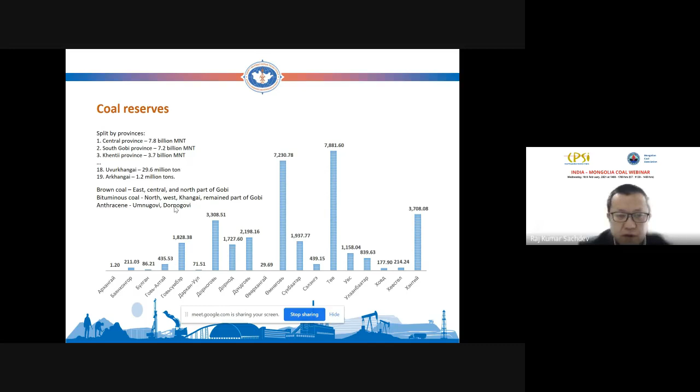In East and Central parts of Mongolia, we have brown coal, lignite, with roughly 3,000 kilocalorie per kilogram heat value, and then bituminous coal and coking coal are located in west, in South Gobi, and in north of Mongolia. Anthracite deposits are mostly in the Gobi desert region, in South Gobi and East Gobi.

Out of 33 billion tons of coal reserves, roughly less than 1 billion ton is anthracite, 13 billion tons is bituminous coal, and 21 billion tons is brown coal.

In the last 10 years, about 353 million tons of coal was mined and consumed for steam, electricity, industry and domestic consumption, and exported.

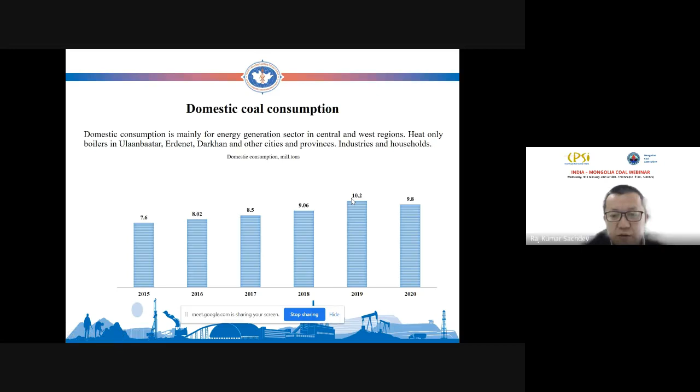Last year, 2020, coal export reduced by 15% because of COVID-19. This graph shows domestic consumption of coal, which is slightly below 10 million tons per year, used mainly for energy generation, electricity and steam.

This data, I guess, is from last year. I have a new one, I will give you later.

The coal for domestic consumption for heat-only boilers is $5 to $15 US, mostly lignite, brown coal. For enterprise industrial use, same price of about $5 to $15 per ton, and household use $4 to $12 per ton.

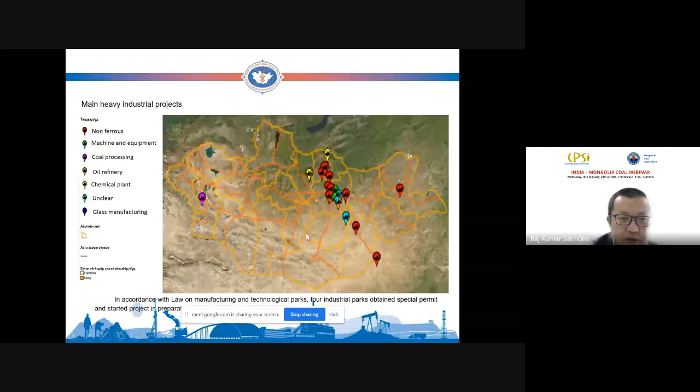One of those projects will be presented here later. These are the non-ferrous projects and some iron ore processing plant locations, and the 3 projects I mentioned about the non-ferrous metal iron smelter are shown here.

Erdenet is the 2nd largest city in Mongolia, and they want to produce cast iron 100,000 tons, reduced iron 100,000 tons, steel items 200,000 tons, and steel bars 160,000 tons.

In Darkhan, where we have the old iron smelting factory, now they want to increase capacity and produce reduced iron, steel bars, and steel balls for mills, for mineral processing plants.

The 3rd project is in Gobi. It is owned by a state-owned company in joint venture with a private company. They also want to produce cast iron, reduced iron, and steel bars. In total, cast iron capacity is 1.5 million tons per year.

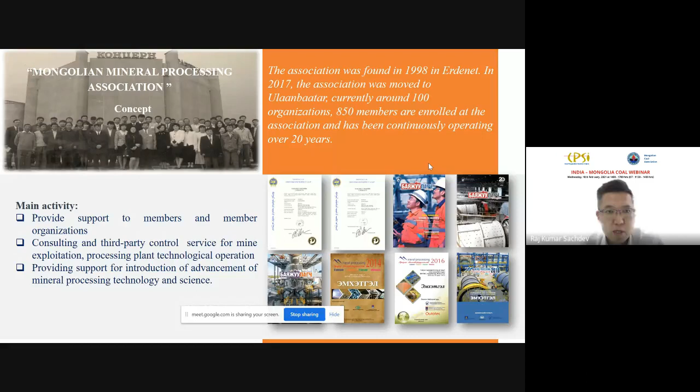This is the continuous table. In total, we now have 21 wet plants, with total capacity of 32 million tons.

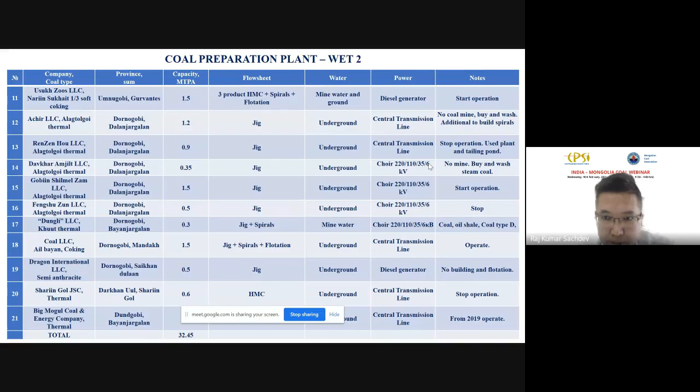Most of these plants were built in the last 10 years, and we are washing thermal coal, mostly coking coal, washed coking coal exported to China, and even thermal coal.

Here is also some thermal coal washing plants. You can see more detailed information, and you can later contact us for more detailed information.

We now have 11 dry processing plants with total capacity of 17 million tons. Mostly the technology is Chinese FGX, and of course Mongolia is dry. Most coking coal deposits are located in the Gobi area, that's why the most interesting technology is the dry technology, and now the second and third generation dry technologies are being tested in Mongolia.

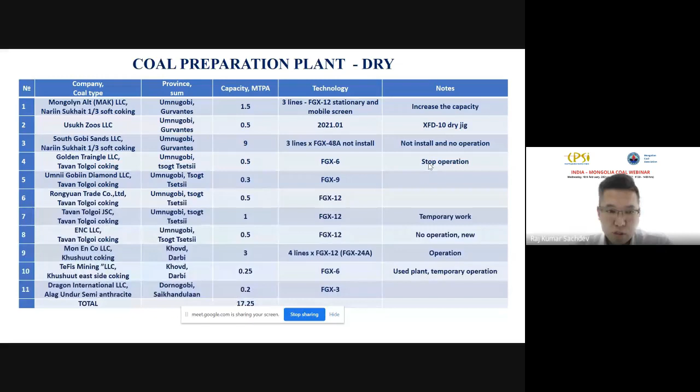You can see here some dry plant pictures, and Mongolia also continues to build the world's biggest coking coal plant based on the Tavan Tolgoi coking coal deposit. This has 30 million tons total capacity.

Here's a summary. Now in 2021, we have total processing plant installed capacity around 50 million tons. From that, only 35% of the processing capacity is used, and we have even more capacity available.

And we can purchase the coal. Even in the near future, we also plan more wet modern coking coal plants in the coal mine, and of course the most interesting technology in Mongolia is dry. We are also interested in dry-wet hybrid technology to build in Mongolian coal mines. The most important project is, of course, in the Tavan Tolgoi and Nariin Sukhait coking coal deposits.

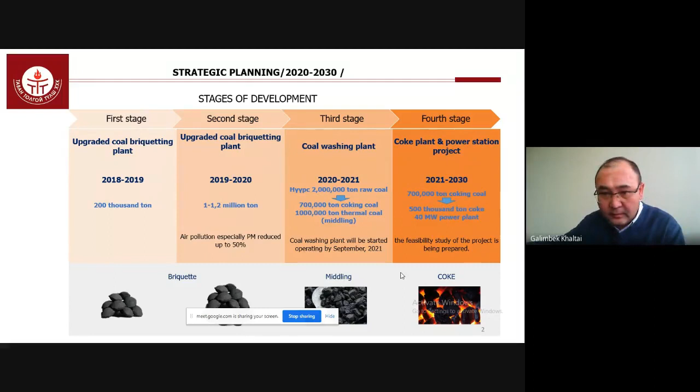Including a coke plant, as you see in the presentation. Now I'm going to introduce you to the current situation of coal coking plants in Mongolia.

The coking plant has 4 coking batteries, each consisting of 30 chambers. That coke making plant has been working on and off, and has never worked at full capacity because of environmental issues.

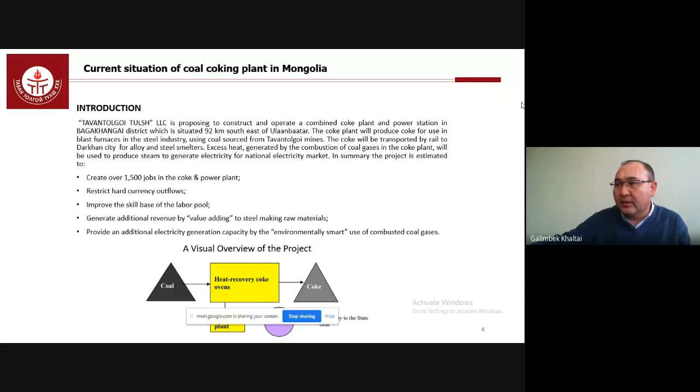As you see on the slide, a visual overview of the project - coal to coke and power process. I'm going to explain it.

The key element to note about the production process is coke is produced by heating coal, and gas is combusted in an environmentally smart way so as to produce the heat to make the coke. Excess heat produced in the process is used to generate electricity. The process doesn't rely on the combustion of coal, only the gas liberated from the coal.

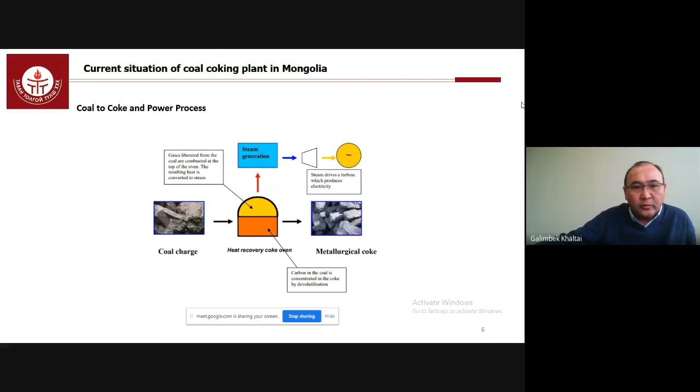Greenhouse gas emissions of the process are typical of simple gas-fired power generation, that is, it raises steam which passes through a turbine. There is a scheme of the coal to coke process.

Now I'm going to explain the need for the project. As each of you knows, Mongolia has huge coking coal and iron ore reserves, which have been exported to China as raw materials. Mongolian iron ore resources are estimated around 1 billion tons, and coking coal resources at more than 20 billion tons.

Now Mongolia has imported a maximum of more than 500,000 tons of steel products from China and Russia. It is valued at 282 million USD over the past 5 years. That import makes up more than 90% of steel supply in the country.

Darkhan Metallurgy plant launched the steel project in order to meet the growing demand for steel import in Mongolia, and the feasibility study of the project was completed.

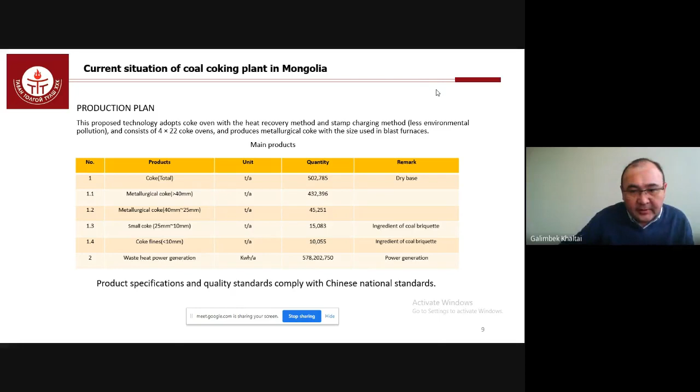There you see the coking process parameters. Also, there is how to work with that coke oven.

Hello? Hello? Am I audible? Yes, we can hear you, Divya. Please carry on. Yes, sure.

Now we would like to have Mr. B. Avid, Secretary General of the Mongolian Academy of Sciences, and he will present the topic Coal, Chemical and Energy: Coal Chemical Studies and Projects in Mongolia.

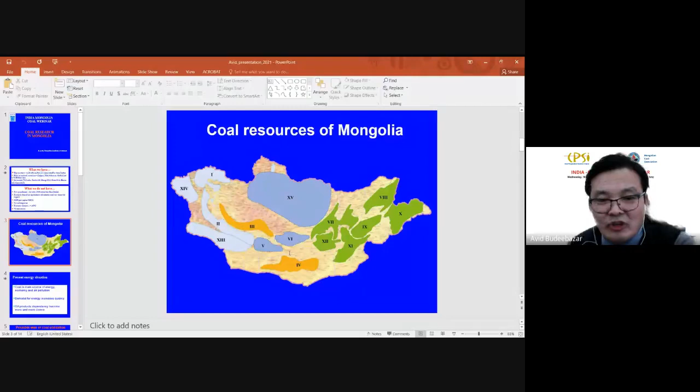But the high quality coals are located in the western part and in the southern part. This high quality coal location is quite close to China, which means it's very suitable to sell or export to China.

So let's say coal is the main source of energy in Mongolia, the main source of the economy, and of course the main source of air pollution. The demand for energy is increasing very quickly due to economic growth, and oil products dependency is getting more and more severe.

So from this we can conclude what is the possible way to use coal. Just in my understanding, the high quality coal should be exported when the price is high. So currently, as you know, we export these coals both raw and washed. I think it's a very good point.

But we have to, or the researchers have to focus on lower rank coals, which are not easy to export because of the quality, and the territory is quite far, so transportation is non-economical. So currently we use the fuel or lower rank coals for power generation, and also for producing some fuels domestically.

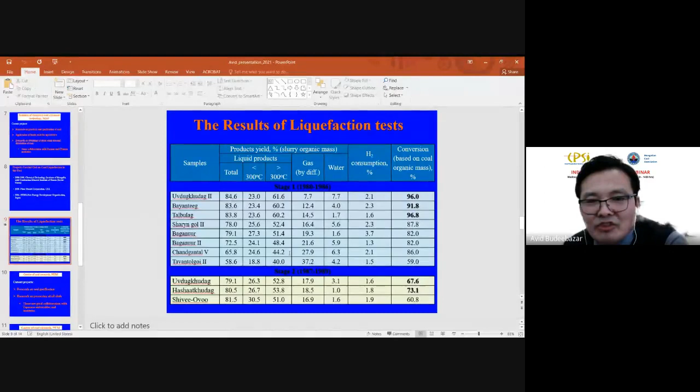Generally, currently quite good research is ongoing in the National University of Mongolia. They also do research on coal gasification and processing of oil shale. Generally, the researchers from the National University of Mongolia have very good collaboration with Japanese universities and institutes.

Also some research is ongoing in the National University of Material Science and Technology. They more or less focus on utilization of coal ash and also research on catalysts for coal conversion and steam reforming. Generally, they have very good collaboration with Chinese universities and institutes.

Just I would like to give 3 references. If you look at these 3 references, you can get general information about coal research in Mongolia, in terms of geology, and of course in terms of chemistry and so on. So I just would like to give these 3 references.

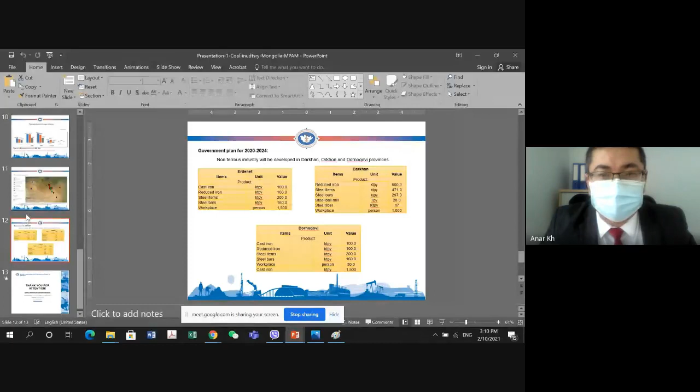This slide shows general information about heavy industry in Mongolia.

There are several policy documents in Mongolia, such as the state policy on the mineral sector and the state policy on heavy industry development program.

In 2019, by resolution number 214, the National Program on Heavy Industry Development was approved.

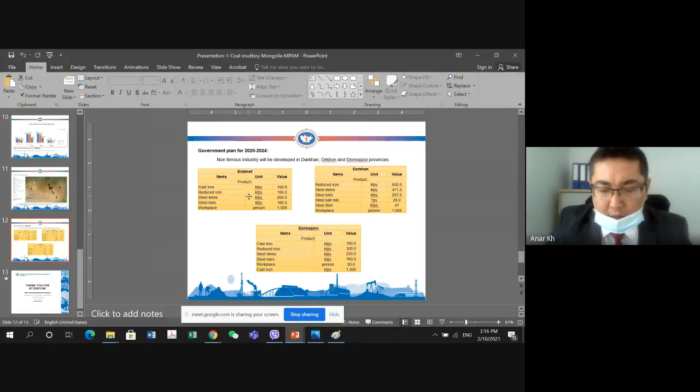So if anyone is interested in those projects, please feel free to contact me through the Coal Association of Mongolia, and I apologize again for not having this presentation due to some issue.

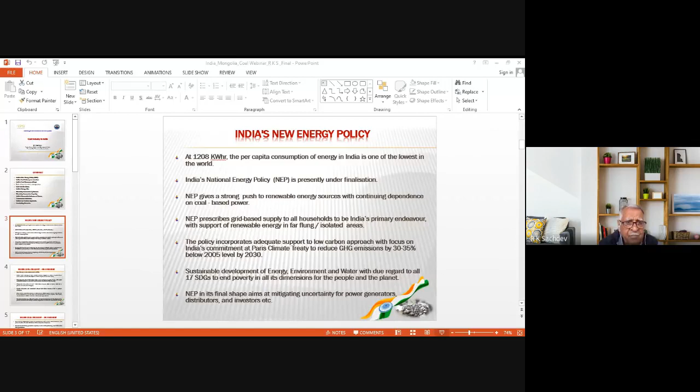On the coal industry, a very brief overview. Our coal mining dates back to 1774, and we are the second largest coal industry in terms of production and fourth largest in terms of proven coal resources in the world.

Our coal deposits have very high ash content because they are of drift origin. Sulfur is very low, below 0.5%. There are 20 major coal fields located in the eastern and southeastern quadrant of the country, which adds to problems of transportation across the country.

The geological resources have been estimated at 344 billion tons. Of these, a little over 150 billion tons are proven resources. Lignite resources are around 46 billion tons, of which about 6 billion tons are in the proven category.

Coal mines were nationalized in 1973, and in 1993 the law was again changed to allow private companies to develop coal mines for their own consumption, but this policy was again changed in 2014. As per the latest government policy, the government has started allowing commercial mining so that private companies can develop coal mines for free sale and consumption of coal within the country, and they can export if there is a market for them.

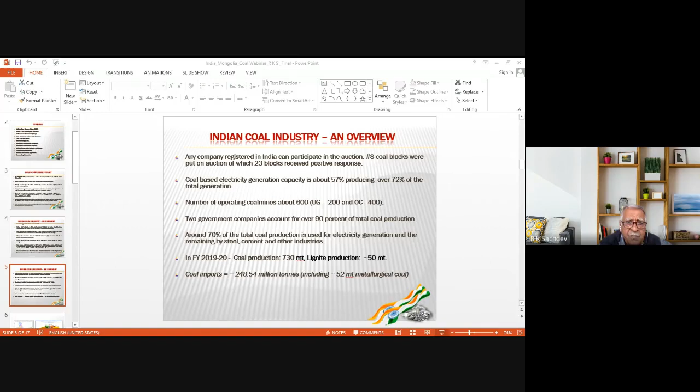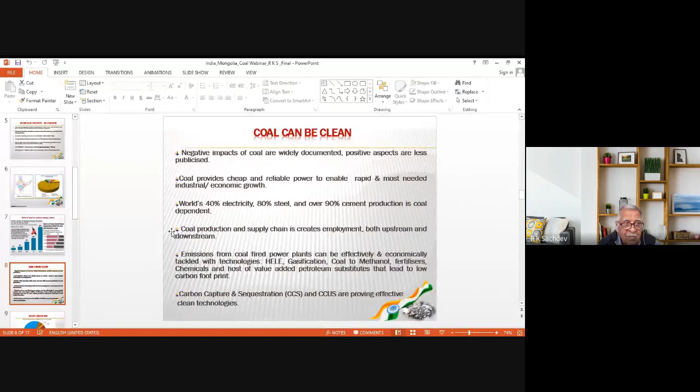Electricity generation by source: in 2019, 1,400 billion units total were generated in the country, of which coal was almost 75%, nuclear was 3.3%, hydro was 11.2%, wind was 4.6%, and solar was 3.6%. This is the total mix of generation of electricity by source.

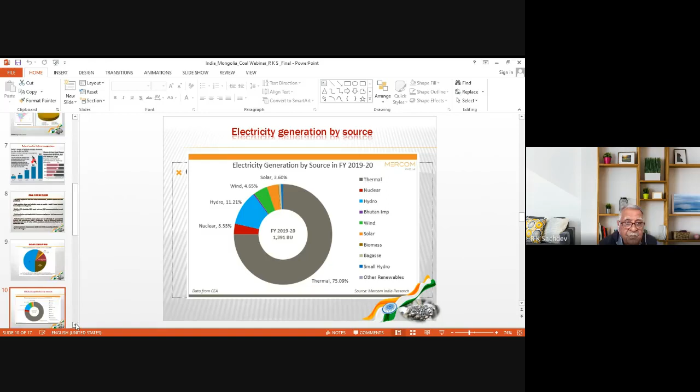While coal will continue to be a major source of energy supply, the country is also putting a lot of stress on renewable energy. There is robust demand, and it is projected to generate 15,000 terawatts of energy in 2040. Projected renewable installed capacity will be 45% of the total in 2030.

Foreign direct investment is coming in a big way to develop renewable energy, particularly solar and wind, because the government has strong policy support aiming at 450 gigawatt capacity by 2030. The target for 2022 has been raised from 175 gigawatt to 225 gigawatt from renewable sources.

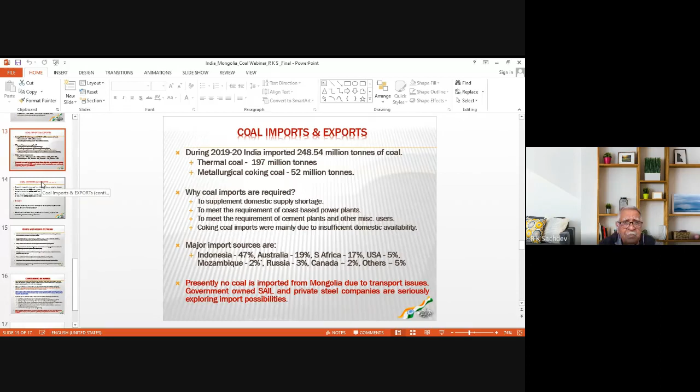What I mentioned about importing from Mongolia is due to logistics problems, but we are working on it together. SAIL and other iron and steel companies are exploring the possibility of getting coal. Our exports are very minimal, and we supply only to neighboring countries like Bangladesh, Nepal, and Bhutan.

On the import side, the government is stressing that imports should be reduced and domestic production increased. But in the matter of coking coal, we will continue to import in large quantities, and probably Mongolia will start supplying coking coal very soon, maybe next year or the year after, so that business relations between Mongolia and India get deeper.

Now, in the current scenario of many countries moving away from coal, given India's shortage of hydrocarbon reserves, we are import-dependent to the extent of 86% on hydrocarbon, oil and gas. So our dependence on coal will continue largely for the next 3 to 4 decades or even beyond. We are stressing on reducing emissions as agreed at the Paris Climate Treaty, as I already mentioned, by having more renewable capacity. There is also a push for electric vehicles, with a program for installation of charging stations at very short distances already underway.

Thank you, sir. My topic of presentation is coal preparation status of India, plant list and technology. I am Gouri Charan, working as Chief Scientist at the Central Institute of Mining and Fuel Research. Next slide, Divya.

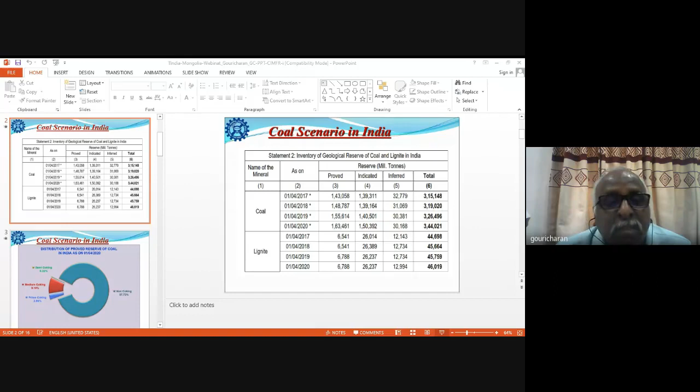As Sachdev sir already told you about the coal scenario in India, just skip this slide, Divya. I wanted to let you know that most of our coal resources, about 87%, are non-coking coal variety, and the rest is coking coal. We also have some high sulfur coals and tertiary coals, but the major part of our coal reserves are non-coking coal reserves. Next slide, please.

Coming to coking coal reserves, most of our coking coal reserves are in the Jharia and Bokaro coal fields. You can see the distribution - most of our present coking coals come from lower seams, since coals in the upper seams are exhausted; now we are going for lower seams, seam 5, 6, 7 and below. These coals have very low volatile matter. I'll now show you the characteristics of our coking coal. Next slide, please.

You can see the characteristics of our coking coal. Our coking coals have very high ash content, ranging from 30 to 55%, even 50-60% in some coals available in the coking coal belt of Jharia, especially in the western Jharia part. Our coking coals have low volatile matter content but are highly mature. One major problem of our coking coal is poor washability potential - they fall under the category of difficult to wash. These coals are very difficult to wash because of typical geological formations, highly intergrown mineral matter, high near-gravity material at the desired density of cut, and poor plant performance. We are presently facing this problem because our washability potential is very poor. I will show you the list of washeries. Next slide, please.

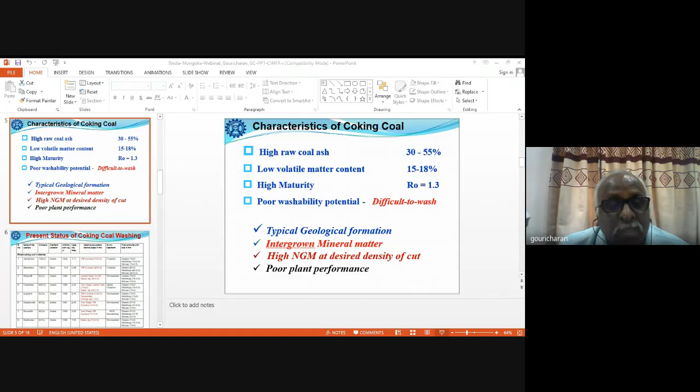We have started with coking coal washing right from 1951. Initially, we had around 35 coking coal washeries in India, both in public and private domain. And because most of our upper seams have exhausted, these washeries were mainly constructed based upon the coal characteristics then available based on the upper coal seams.

Now we are mining lower seam coal, and when these coals are fed to the old coking coal washeries, they don't perform well. That is why most of our coking coal washeries have been dismantled, and they are going for new washeries. Presently we have 16 coking coal washeries under operation, 8 in the prime coking belt of Jharia, and 8 in the medium coking coal washeries in the Bokaro coalfields.

For coking coal washing in India, we mainly use jig separation for coarser particles, heavy medium cyclone for the intermediate range, and flotation for coal fines. But most public washeries, like CCL and BCCL (Bharat Coking Coal Limited) washeries, don't process the coal fines. They are just left out, segregated in tailing ponds, and used for different purposes.

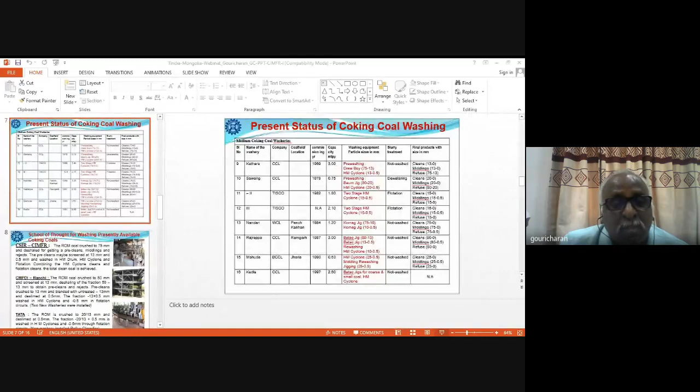So what is the school of thought presently for coking coal? We have recently carried out a lot of tests on low volatile coking coals, and 3 schools of thought have come up. One is the Central Institute of Mining and Fuel Research school of thought, where we crush the ROM to a top size of 75 mm and deshale to get pre-cleans, middlings, and rejects.

The pre-cleans are screened at 13 mm and 0.5 mm, and then washed in HM drum, cyclones, and flotation. Combining these 3 cleans, we get the total cleans. So this is the school of thought for a simpler process.

CMPDI Ranchi has their own school of thought: the ROM coal is crushed to 50 mm and screened at 13 mm. The fraction 50 to 13 mm is deshaled to obtain pre-cleans and rejects. Then the pre-cleans are crushed to 13 mm and blended with the untreated minus 13 mm. They are deslimed at 0.5 mm, and the fraction 13 to 0.5 mm is washed in heavy medium cyclones, while minus 0.5 mm is washed in flotation.

Based upon this school of thought, 2 new coking coal washeries have come up in India recently and are under operation, and a few more washeries are coming up based upon this scheme.

While Tata's, right from the beginning, crush the ROM coal to 20 or 13 mm top size, screen at 0.5 mm, wash the 13 to 0.5 mm fraction in a 2-stage heavy medium cyclone, and wash the minus 0.5 mm in the flotation circuits.

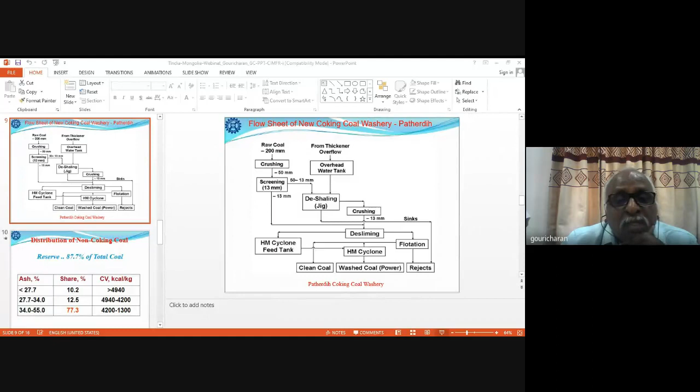Coming to non-coking coal, already we have a huge resource of non-coking coal, but unfortunately, the majority of our resources fall above 34% ash content. Its share is around more than 77%. So these coals we need to wash and use in power plants or for other uses.

The non-coking coal washing presently adopted in most Indian non-coking coal washeries involves washing only the coarser fraction, that is plus 30 or 13 mm, and mixing the minus 30 or 13 mm with the clean coal. So this is a partial beneficiation approach. One typical example is the Piparwar coal washery, a non-coking coal washery following this partial coal beneficiation. They only wash the coarser fraction in a jig, and the minus 30 mm is blended with the cleans from the jig and used for power generation. So this is the typical washing option followed in India, especially for beneficiation of non-coking coal.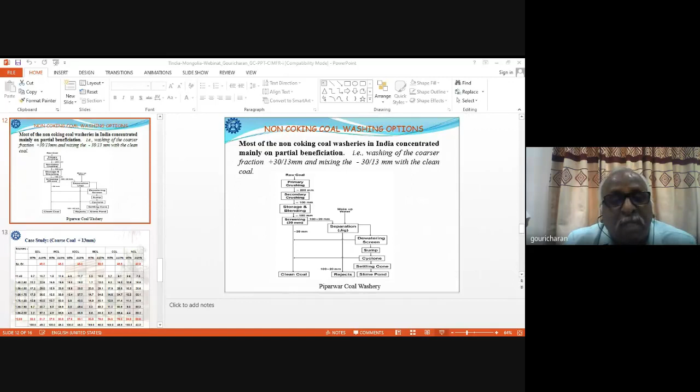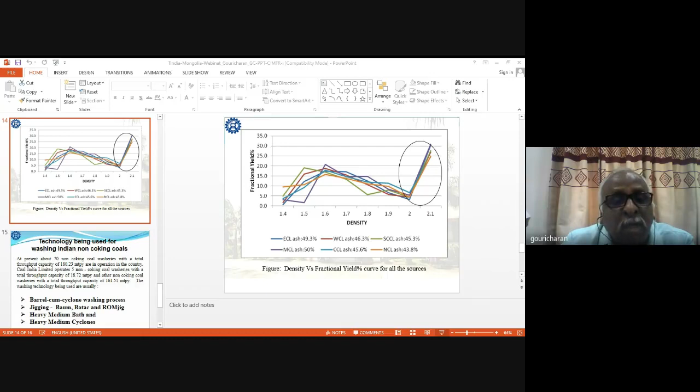The next graph will show you that most of the coal is concentrated about 2 specific gravity. So we may not require a very high level of washing, just simple deshaling. If we remove the material above 2 specific gravity, we will achieve more or less 30-35% ash material. So for our Indian coal washing, we need only simple deshaling. If we deshale in a jig or anything, we can remove this high gravity material instead of going for a very complicated circuit like using an HM circuit; we can simply remove this material above 2 specific gravity, and then achieve our required ash in the clean coal.

Already technology is being used for washing non-coking coal. Most of our 70 non-coking coal washeries have a total throughput capacity of about 180 million tons per annum, and Coal India Limited operates 5 non-coking coal washeries with a throughput capacity of 18 million tons per annum, with others in the private sector. As already told, most of them go for partial beneficiation only, using barrel cum cyclone washing process. Some washeries have installed barrel washers. We also use jigging, all types of jigs like Baum jig, Batac jig, and rom jig; Bina washery has installed a rom jig. In some washeries they use heavy medium bath and heavy medium cyclone. So fines are not being beneficiated presently for non-coking coal; only the coarser fraction is washed.

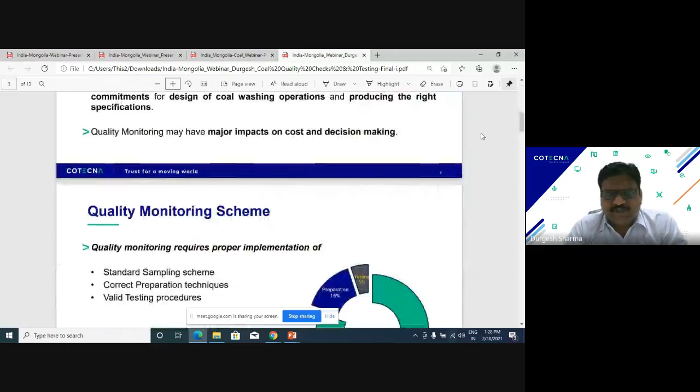We know a lot about Indian coal, which has been covered by Sastev sir and Dr. Gauri Charan. Now let us look into how quality is to be maintained, or how quality monitoring is to be done, in the supply chain of coal. Quality monitoring is an essential requirement for process control, plant performance, and for any transaction between the consumer and the producers. This is very important in all these three factors.

It requires proper implementation of a standard sampling scheme, preparation, and testing procedures. How can it impact? In the coal mining and processing industry, the decisions may involve huge capital investments for designing coal operations and producing the right specifications. That's why quality monitoring may have a major impact on cost and decision making.

Next slide please. In a quality monitoring scheme, there are 3 major steps which need to be properly implemented: sampling, sample preparation, and testing. If you see the graphs, sampling itself contributes to approximately 80% of where sampling variations take place. So the sampling activity itself is very important. 15% is contributed through sample preparation, and only 5% in testing, because a lot of sophisticated instruments are available for testing the quality of coal in the lab these days.

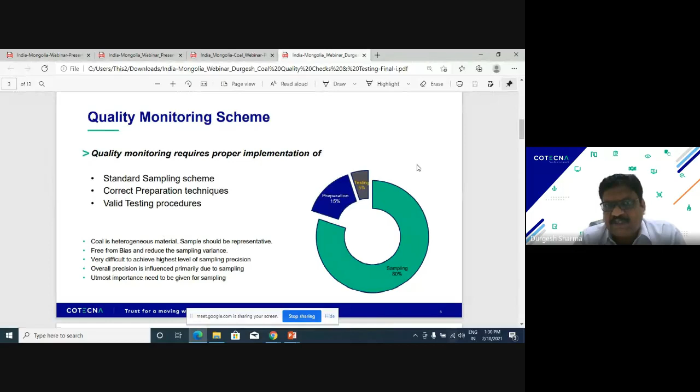Next slide please. Coal quality checks at the value chain: starting from exploration up to the market, coal goes through these 4 steps - exploration, mining, processing, and then utilization at the consumer places. It is either used in the blast furnace or in boilers, wherever it is used. At each step in the quality checks in the value chain, it has sub-processes.

At exploration, coal quality has to be taken care of at the exploration stage when you are drilling the cores - what is the geology of the coal, what is the mineralogy of the coal. All these properties make a lot of difference when the coal is utilized for a specific purpose. So at mining, we also have to take care of quality checks and testing, and the sub-processes have been defined here.

I will not go through the total details of each process here due to time constraints, but you will get this presentation and can go through it. Processing also, of course, for plant efficiency - sampling what we are feeding to the plant and what we are getting out of it has to be controlled. Then in the market, the specific requirement of the specific use, whether it is power plants or steel plants, those quality checks have to be maintained as per the required specifications of the market.

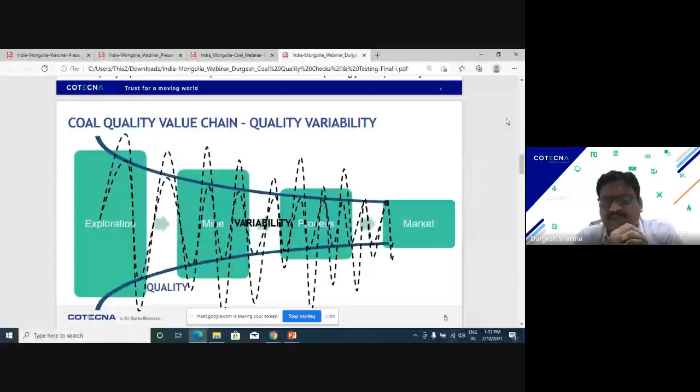As I mentioned, sampling scheme, preparation and testing are the 3 major steps of quality monitoring.

In sampling scheme, due to technical, cost and time constraints, the sampling procedure can be modified from the standards. We have BIS standards in India, ASTM standards, and ISO standards, but depending upon these 3 parameters, it can be slightly modified.

But while modifying and implementing or establishing a sampling scheme, we have to take care of a few aspects which are important to get a correct representative sample and to get the correct results.

That is the purpose of the sample. What is the purpose of the sample? You are doing it for a regular quality check, for the plant design, or the process design, or using it at the blast furnace or power plant. So what is the purpose of taking the sample?

Increment collection method - whether the sampling should be mechanical or manual. Decide whether continuous or intermittent sampling is done. Sampling should be from moving belts or stationary lots. Selection of appropriate procedures, define the lots, number of lots, increments, mass of the increment, and the sampling device which we are going to use, because all these conditions affect the sampling precision and accuracy.

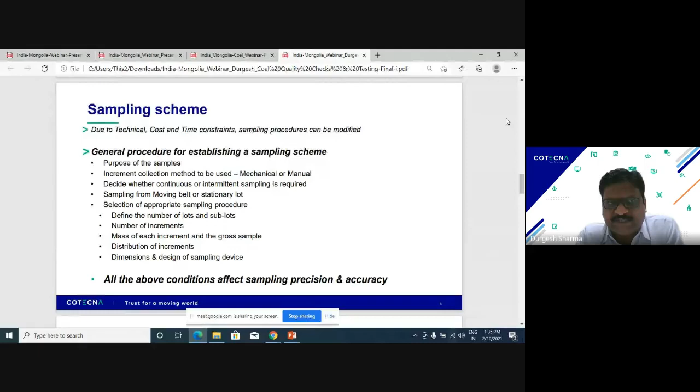This is the importance. Please, next slide.

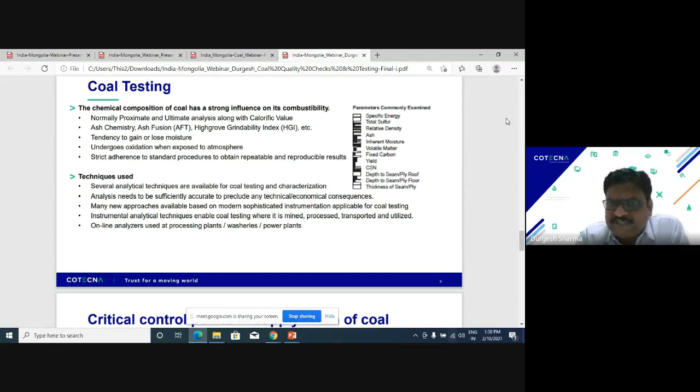What are the techniques used for coal testing these days? There are several techniques available in the market for coal testing and characterization. A number of modern, sophisticated instruments have come up, like even for proximate analysis, ultimate analysis, or calorific value - you have high accuracy instruments available in the market which give very, very accurate results when tested in the lab.

As I mentioned in the first slide itself, only 5% errors in the coal testing labs, because you have the sophisticated instruments available for this. So sufficient accuracy of the results is important.

Instrumentation analysis techniques are also available, and they can be applied at the complete supply chain of coal, that is where it is mined, where it is processed, where it is transported, and when it is utilized in the plants. There are online analyzers also available these days, which give you a quick analysis, and they are implemented or installed in some of the processing plants, washeries, and power plants also, which gives you the quick analysis.

These are some of the critical control points in the supply chain. At the mining head, we have to look at in-pit drilling, sampling, and data analysis. Sizing of the coal matters a lot, because smaller the size, better would be the precision, and more representative will be the sample.

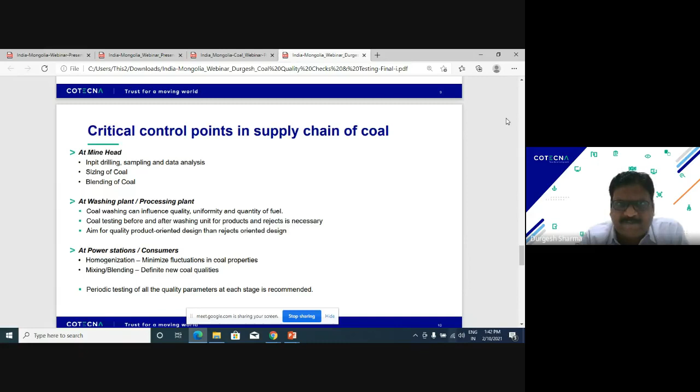Losses and measure techniques can also be defined here on a short-term and long-term basis. In the long term, it is recommended that auto-mechanical sampling systems should be available at all sampling points, so that you remove human interference and human errors. Auto-mechanical augers for stationary sampling and auto-mechanical samplers for bulk sampling - this can be the long-term solution.

But sometimes if you have to go for manual sampling, short-term losses and measures techniques are also defined. When you do the sampling or quality checks manually, you should have practical procedures of routine implementation and checks, so that you minimize errors and perform periodic tests at each stage for each activity. Those periodic tests for sampling and testing measure overall precision - you have to measure that so you understand how much you are deviating from the standard. This includes increment variations, sampling and preparation and testing variance, and bias test. This bias test should be done even for mechanical sampling devices as well.

This is one example of how quality control is introduced by the Government of India in domestic coal supply to the power industry. The objective of this project is establishing quality control in domestic coal supply from coal mines up to the thermal power plants. This exercise is conducted in collaboration with three ministries - the Ministry of Coal, Ministry of Power, and Ministry of Technology - and it has been sublet to my company, that is Cotecna Inspection India.

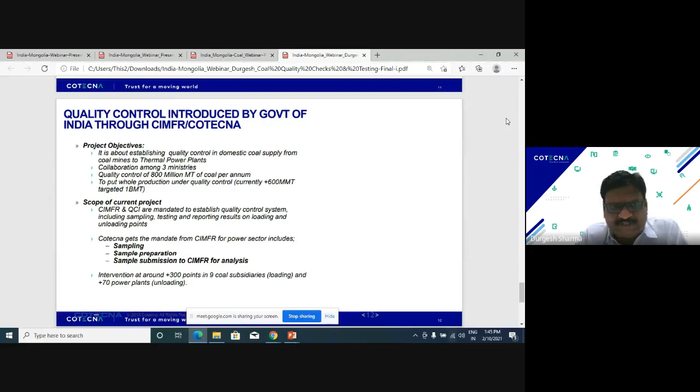I would conclude with this: there are different flavors of coal, different tastes in boilers, and different reasons to select one recipe or technology instead of another, because coal is an economical source of energy, and controlling coal quality is a way to do more with less.

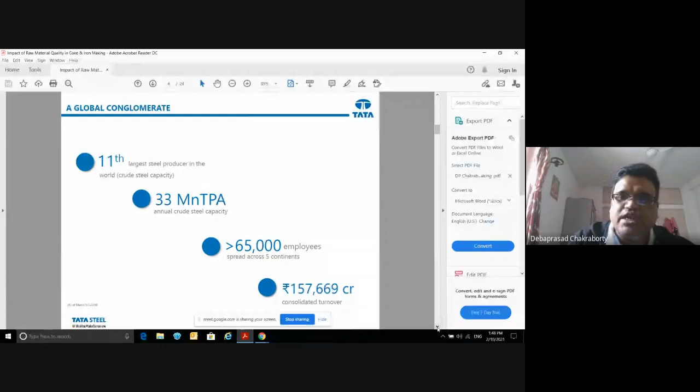We are from Tata, built on Jamshedji's vision, well known to many people in India and I think for the rest too. We have a global presence in 26 countries with manufacturing operations, and commercial presence in 50 countries. We're a Fortune 500 company, and as a global conglomerate we are the 11th largest steel producer in the world, with more than 65,000 employees across 5 continents.

If you see Tata Steel's value chain, it starts from raw material to marketing. In the case of raw material, we have our own iron ore mines, and in Indian operations we are self-sufficient in that. For coal, we have both underground and open cast mines, and from there we supply coal to our iron making process.

But because the coking coal reserves in India are not much, as told by earlier speakers, and considering the mines and collieries we have, we are able to supply only 30% of the total demand. The rest is imported.

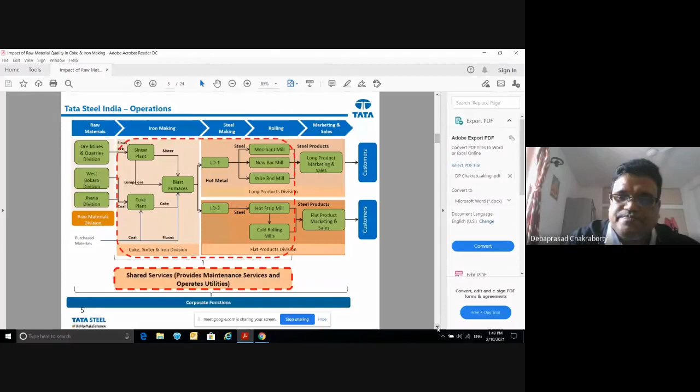Now this is the iron making operation. In brief, in the blast furnace we are making hot metal, which goes finally to the next step, that is steel making.

In the blast furnace, the burden mix we use is basically sinter, pellet, and lump. The distribution is around 50% sinter, around 40% pellet, and 10% lump. This is the burden we generate, and coke is the reductant.

As I said, only 30% is supplied from our captive coal mine, and the rest we are importing. We are also injecting PCI, and I'll be explaining why we are doing all these things.

Now, on slide number 7, the Indian iron ore occurrence - we are in the eastern part of India, and all our deposits are iron ore. If you see the deposits in India, there are two types: one ferruginous in nature, and the other siliceous in nature. Our deposit is mostly ferruginous in nature, where the main gangue is alumina.

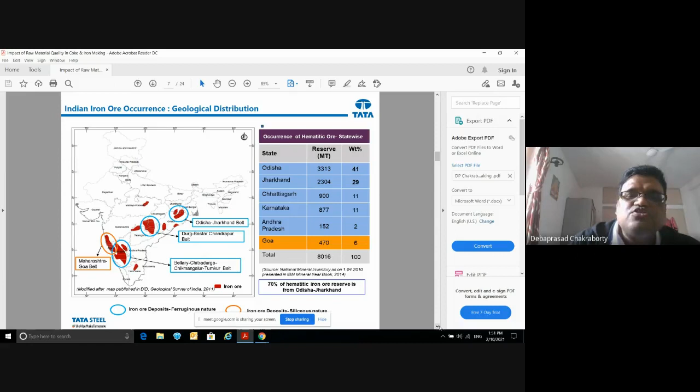Now on slide number 8, the iron bearing minerals available across the world are hematite, magnetite, limonite, and goethite. There are other iron bearing minerals too, but specifically for India, these are the main ones.

As I said in the earlier slide, majority, about 70%, is hematite only, and the rest is other types of materials. The major gangues are in the form of gibbsite, kaolinite, and quartz, which is mainly alumina. I will explain in subsequent slides the impact of alumina on the downstream process.

So now I am in slide number 13. I don't know why, but it's showing 13 here.

This slide covers increasing alumina levels' impact on agglomeration, blast furnace, and steel making process. Increase in alumina in the fines leads to increase in heat rate, reduced productivity, lowering of the tumbler index of the sinter, and the reducibility of the sinter also gets impacted. Whenever high alumina is charged to the blast furnace, there is an increase in heat rate, a drop in productivity, and the flux requirement also goes up.

So there are multiple impacts if we allow the gangue to go to the next level of the process. Just a ballpark figure: if we are able to reduce alumina by 0.1% in the iron ore, for a 10 million ton crude steel production level, there will be a benefit of around 277 crore. That is the magnitude of benefit from reducing gangue in the upstream process.

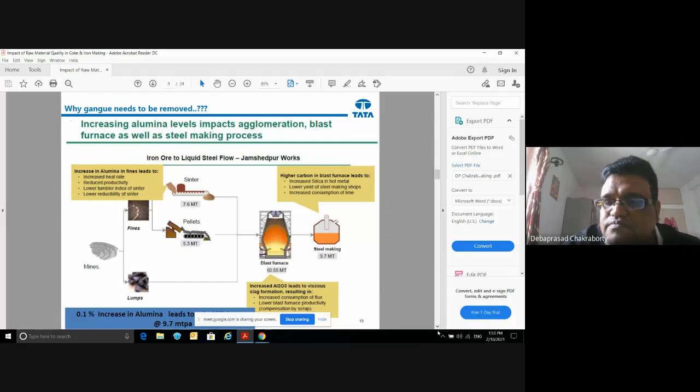Now, impact on the pelletizing process. If there is more goethite in the process, you know goethite contains a lot of LOI. Because of the LOI, you need to remove that first in the process, and for that you need energy, and the process also needs to be slowed down. As a result, there is an impact on both productivity and heat input. So this is an example of how different types of gangue impact the downstream process.

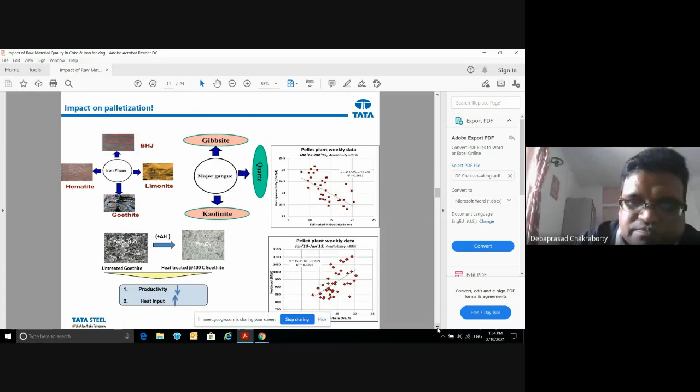Now I'm coming to the coke slide, slide number 12. If you see the hot metal cost - this is specifically for Tata Steel as an example, since all our iron ore comes from our captive iron mines - you know that coke cost is the major cost for our hot metal production. 50% of the total hot metal cost is basically because of coke.

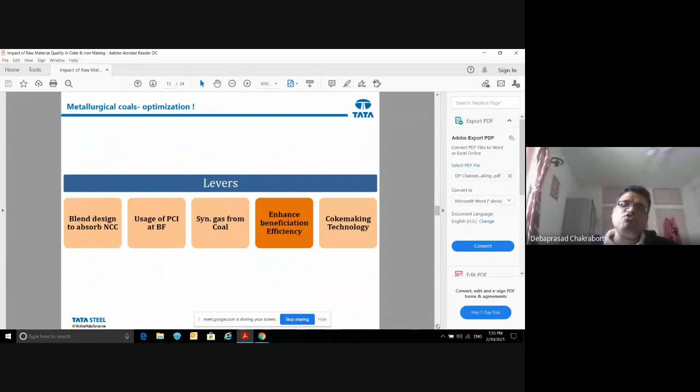So you can imagine the importance of coke and its ingredients for the process. Our entire effort is basically how to optimize coke in terms of the consumption of metallurgical coal, so that we can get an advantage in terms of cost.

There are several levers we generally exercise. One is blend design - this is a unique thing, it varies company to company, but our motto is to absorb some non-coking coal to reduce carbon rate consumption. There are also several efforts from Tata Steel for syngas from coal.

We're doing a lot of study on underground coal gasification for deep-seated coal seams in Jharia, where normal mining is not very feasible, and as you go down, the quality of coal also comes down. So this is an alternate method of mining as well as using the energy. A lot of work is going on in this area, and we are also working on CO2 sequestration, which is again basically for that.

Yes, which is there. Okay.

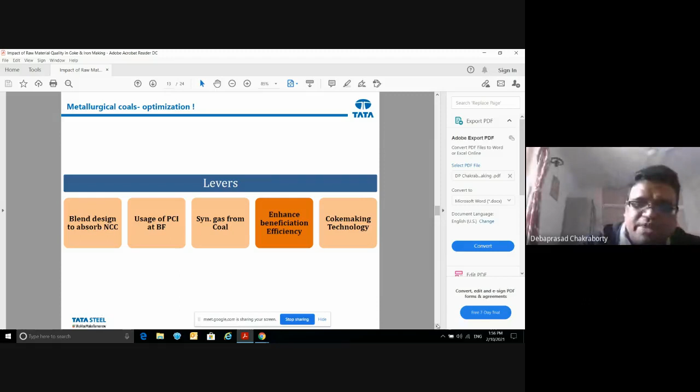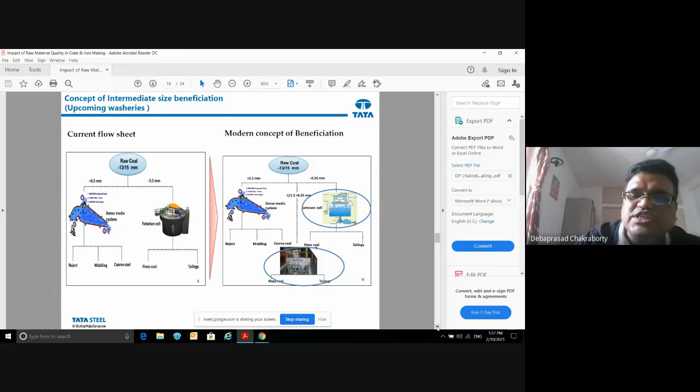So now moving to enhancing beneficiation efficiency. Our main objective is to improve the efficiency of the process, to get a higher yield at the same ash. This is an ongoing journey, so I won't explain all the details. There are a lot of technologies Tata Steel is adopting to reach that level. Mr. Godichand has already explained how Tata Steel moved from the current flow sheet to the three-product intermediate size beneficiation process, all aimed at improving process efficiency.

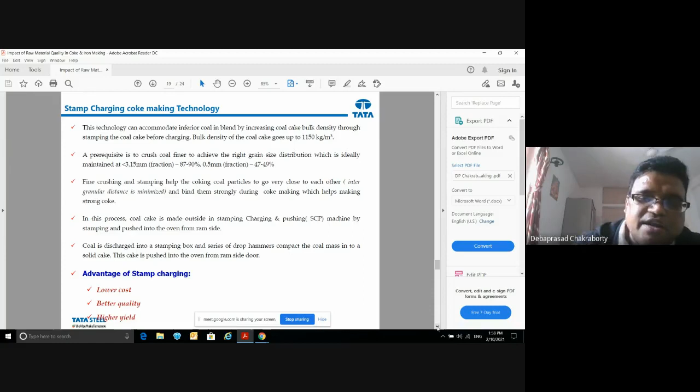Now coming to coke making. There are different types of coke ovens. In Tata Steel we have heat recovery and byproduct recovery ovens, and all are now stamp charged. There are a lot of advantages of stamp charging over top charging, mainly lowering cost, better quality, and higher yield. If you look at the table, Tata Steel also had top charge ovens and gradually shifted to stamp charge. The reason is that hard coking coal consumption, which used to be 80 to 85%, has come down to 20 to 30%. This allowed us to inject more medium coking coal and semi-soft coking coal in the blend, and as a result, without impacting coke quality, we were able to reduce the blend cost. Here are comparative tables of stamp charging versus top charging, and as I explained, we got a very good benefit in terms of the various parameters monitored for good coke.

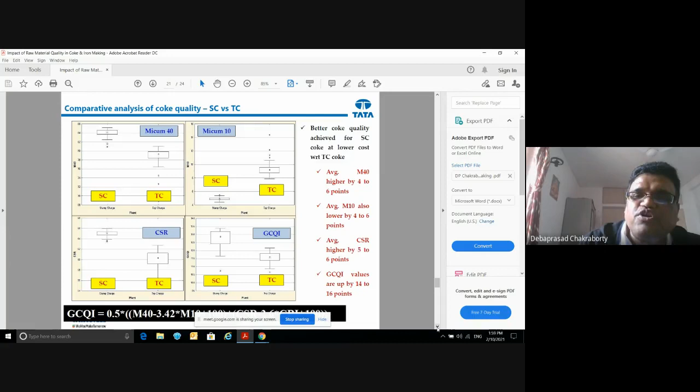Now I'll be requesting Prasenjit to explain steel making. Thank you.

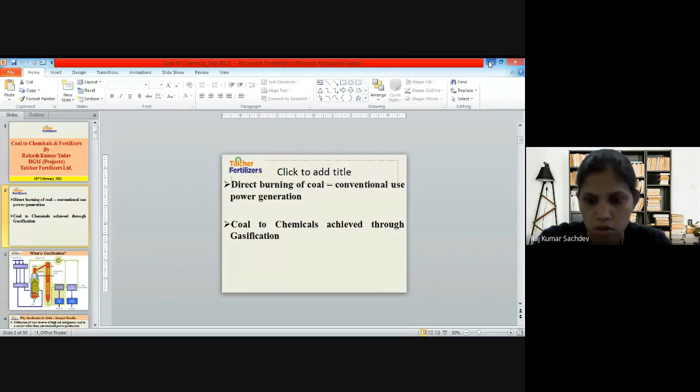Mr. Yadav, please start. Why isn't your voice coming? You're not able at all. You've kept yourself muted, please fix that. Shown unmuted, but your voice isn't coming through. I can see you're muted. Now you're unmuted, now you start.

Sir, he has left the meeting. We can have PK Tripathy's presentation. Let me try again. Yes sir, I am here, you start. Divya, if you can kindly present the slide. I'm trying, is it visible now? Not yet. It's coming now? Yeah, it's visible, okay.

Thank you, good afternoon all. Myself Prasenjit, and I will be presenting on behalf of Mr. PK Tripathy on the steel making part for Tata Steel Jamshedpur.

The basic outline of my presentation will be on the conventional routes for making steel, which is one is BOF versus EAF. Second, the Tata Steel Jamshedpur steel making facilities. Third, the primary steel making, that is hot metal desulfurization, basic oxygen furnace, online purging, followed by secondary steel making like ladle furnace, RH degasser, composition adjustment, and the last, the clean steel making and the various challenges for the critical steel making aspect.

So the first most conventional route for steel making is the BOF steel making, that is basic oxygen furnace steel making. So if you look the process flow, first in this process, the hot metal comes from the blast furnace to the LD shop. In the LD shop, first we are desulfurizing the hot metal, followed by steel making, removing carbon, oxygen, manganese, silicon, phosphorus in the BOF.

If we look at a photo of the BOF, there is an oxygen lance from the top. So basically, checking the chemistry of the input hot metal, the carbon is as high as 4 to 5%, while the silicon is near about 0.5 to 0.6%, with a high phosphorus level. The customer demand is always for lower phosphorus, lower silicon, lower carbon level. So we need to remove these impurities by blowing oxygen into the hot metal. When we blow the oxygen, silicon oxidizes and gets removed, followed by phosphorus and carbon in the form of P2O5 and CO2.

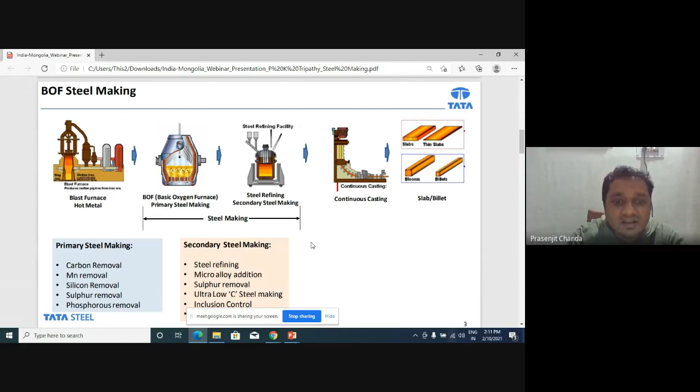The other route for steel making is the EAF process. Here, the raw material for the EAF is mostly scrap. Scrap accounts for nearly 70 to 80% of the raw material, and the remaining is covered by DRI or hot metal, so it is a different process.

Right now, in Tata Steel Jamshedpur, we are not using this process of making steel. We are following the BOF route. Also, in this EAF process, the quality of the scrap depends on the final product because the scrap might contain harmful elements, so depending on the final product, the decision on what type of scrap to use depends on the product mix.

If you look at Tata Steel in India, there are a total of 3 plants: Tata Steel Jamshedpur, Tata Steel Kalinganagar, and Tata Steel Bhushan BSL, which we acquired recently. My presentation will mostly focus on the Tata Steel Jamshedpur facilities. We have 3 steel plants: LD1, LD2 slab caster, and LD3. LD1 produces long products, while LD2 and LD3 produce flat products - that is, slabs versus long products like billets. The total capacity of all three plants combined is 10 million tons.

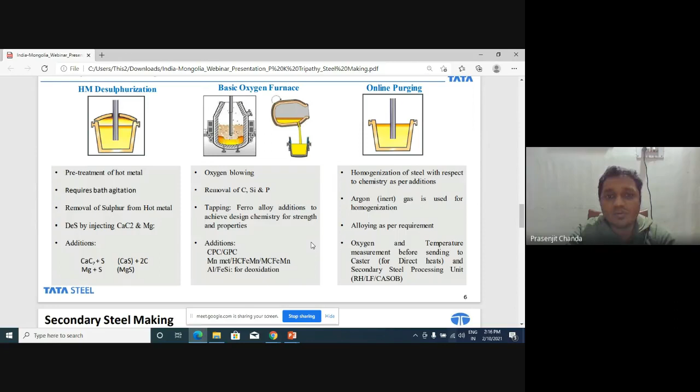Once after BOF, it goes to the online purging station. Basically what we do in the online purging station is, once you add the ferroalloy, it needs some time to mix, and also there's a temperature inhomogeneity. So we need to homogenize the steel, for which we pass an inert gas, that is argon, for mixing so that the ferroalloy goes well and mixes into the steel.

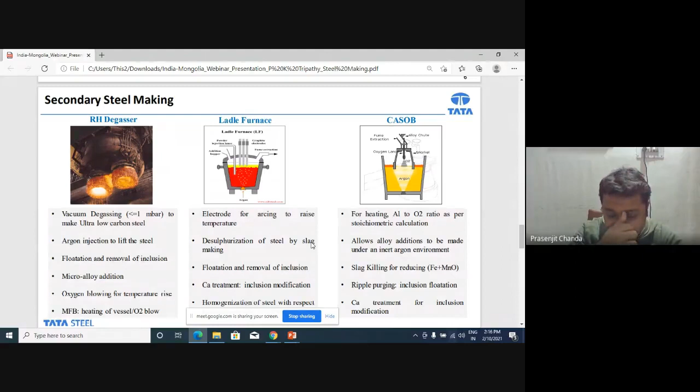Everybody knows we use in auto body parts, like car body, car hood - all the auto bodies - the carbon demand is very low, at the level of 20 ppm or 15 ppm. So initially hot metal is 40,000 ppm, then 400. Now the customer requires a maximum of 20 ppm, such a lower level of carbon.

So to achieve that lower level of carbon for the auto customers, for all car bodies or two-wheeler customers, we need to process the heat in a vacuum degassing unit, like RH, where we achieve vacuum from atmospheric pressure down to as low as 1 millibar, so that a reaction takes place where carbon reacts with oxygen to form CO. In this way, we remove the carbon to the ultra low level as per the customer requirement for auto customers. Most auto customers demand such lower carbon levels, in the ultra low carbon ppm range.

Now coming to the next stage of secondary refining, this is the ladle furnace. If you can see this ladle furnace, basically we are doing two things. First, there are 3 electrodes. We want to raise the temperature for addition of some ferroalloy elements which require much higher temperature to dissolve. So we will be arcing and raising the temperature for proper alloying of ferroalloys like titanium, niobium, chromium, molybdenum, as per customer requirement.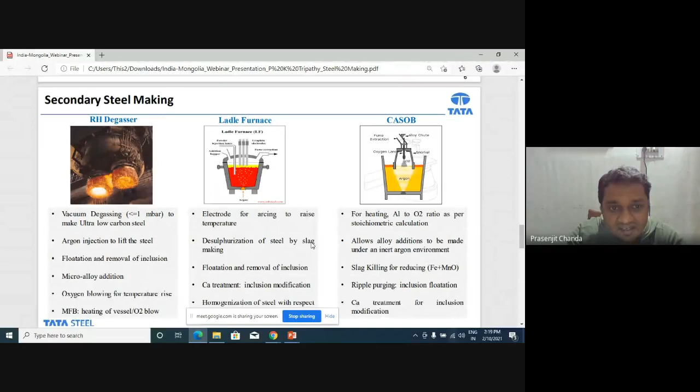And the last is CASOB, this compositional adjustment submerged oxygen blowing. In the earlier process, like ladle furnace, as I explained, we are arcing, using electrode to arc to raise temperature. But in this process, we will not arc. What we do generally is add aluminum and also blow oxygen. So aluminum reacts with oxygen to form alumina, which is an exothermic reaction, and it increases the temperature.

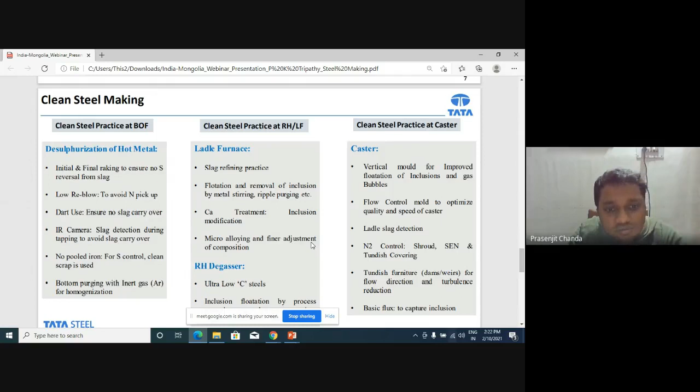That's all from my side. Thank you.

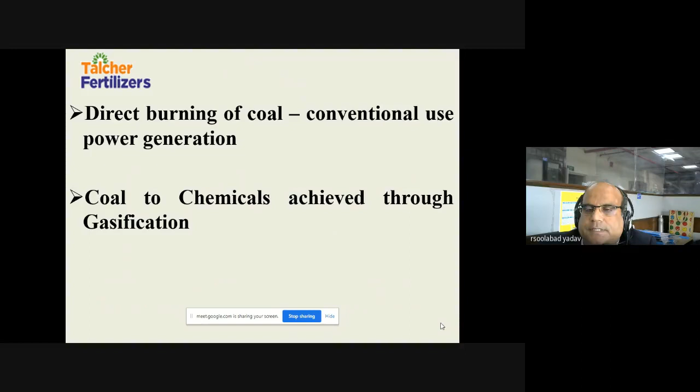So what is gasification? There are three types of technology for gasification. First is fixed bed, which operates in the range of 425 to 650 degrees Celsius with a particle size of 6 to 50 mm. Due to operation at low temperature and low pressure, it produces various byproducts, though it can handle high ash content also. In India, the Jindal plant is based on this technology, from air liquide.

Second is fluidized bed. It operates in a range of 900 to 1100 degrees Celsius, particle size 6 to 10 mm, and coal conversion is better than fixed bed. However, it cannot handle high ash content, and licensors are SES, Winkler, U-Gas, etc.

Third, which we can say is the best, and nowadays various plants are coming based on this technology, is entrained bed. This gasifier operates in the range of 1250 to 1600 degrees Celsius, with particle size less than 100 micron, and conversion is best - coal conversion is greater than 99%. Licensors are mainly Shell, which has been taken over by Air Products, E-Gas, Mitsubishi, Siemens, ConocoPhillips.

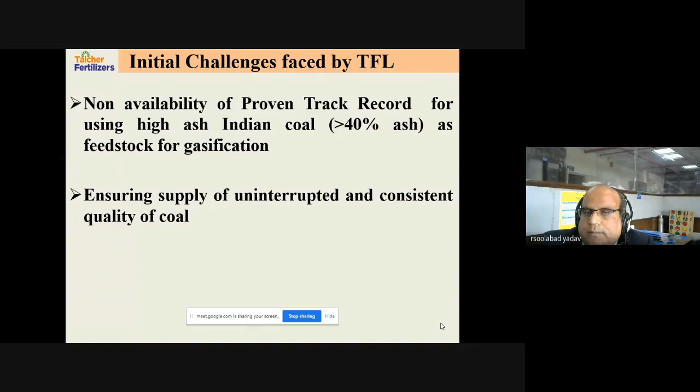Ultimately, in a third attempt, we put in the option of mixing coal and pet coke, because worldwide gasifiers are running, at maximum, handling up to 33-34% ash, and majority of gasifiers run on less than 25% ash content. In our case, in the Talcher region, coal normally has ash content in the range of 40-45%. So we had to reduce it either by washing the coal or by mixing pet coke. We tried washing of coal, it was also part of the EOI, but doing that generated a lot of rejects, and using those rejects would require a very big power plant. So it was felt that we should go ahead with pet coke blending.

By blending we have kept the option of up to 25% blending. We will reduce it up to 32%, based on which the plants are running in China. 4 to 5 plants are operating in China based on Shell technology. So by doing this, the risk of high ash was reduced.

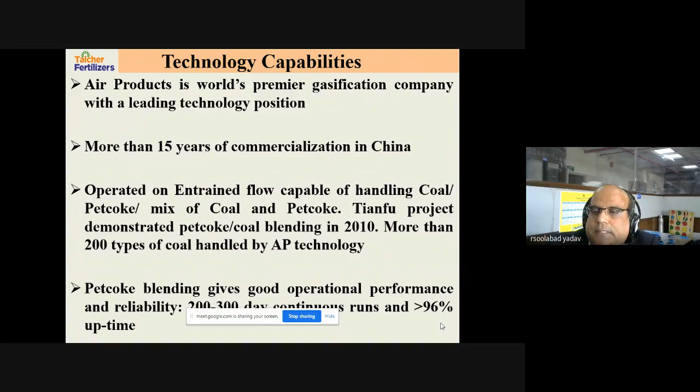There are more than 22 licensed projects and 24 gasifiers in operation with this technology, 17 gasifiers with 200 ton capacity, which is in the range of our capacity. Several AP sites are operating on high ash coal from 6 to 37%. In our case, after blending, it will be in the range of 30 to 33%. 4 AP plants in China have operational experience on pet coke blends, as earlier described, for ammonia production.

Flexibility of the coal gasification process: the technology has flexibility to increase. We have fixed up to 25%, depending upon economics and ease of operation, but we can reduce during operation, because in India there is no plant available based on this technology. So once we start operation, we can change the percentage, increasing coal and decreasing pet coke depending on our economics and ease of operation. The Talcher plant will normally operate on a blend of 75% coal and 25% pet coke.

Pet coke addition is to be guided by operational ease and plant economics. Plant equipment is designed for 100% pure coal operation. Basically, the gasification section is designed so that it can take care of ash content of coal in the range of 40 to 43, 47%. In case of pure coal, our gasifier will run at around 70% capacity, and if we go for the blending case, the gasifier will run at the rate of around 70% capacity. Each gasifier has a plant load capacity of around 70 to 75% for continuous ammonia urea production.

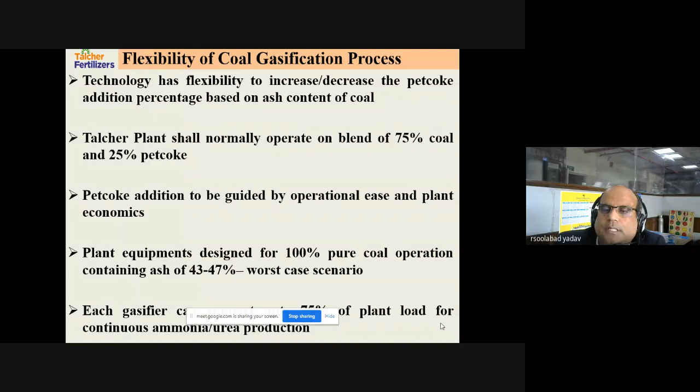Operational reliability: overall plant reliability of various plants is 96.3%. The carbon conversion efficiency is more than 99%, coal gas efficiency is 78%, and total thermal efficiency is around 92%. This reliability data is from AP, at 96.3%.

4 projects successfully used pet coke blended with coal, with one plant reaching 320 days at full operational load continuously. 11 plants clocked more than 300 accumulative running days, the longest being 346 days, with thermal efficiency of 95.9% and 99% conversion.

This plant, Dongting, is located in China. The JV achieved 100 million safety man hours. These figures are all based on Air Products technology. Next, please.

This is the recently commissioned plant based on air product technology, the Luan joint venture, with an investment of around 1.3 billion, producing around 720 thousand Nm cube per hour of syngas, based on air product technology.

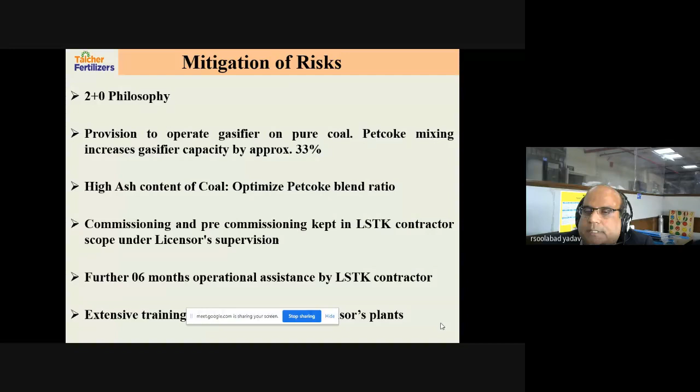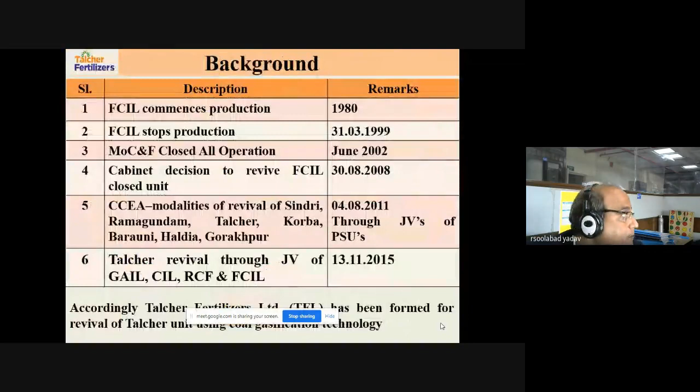Next, please. Yeah. Oh no, can you go back? Back. This is the next slide. Yeah, next please.

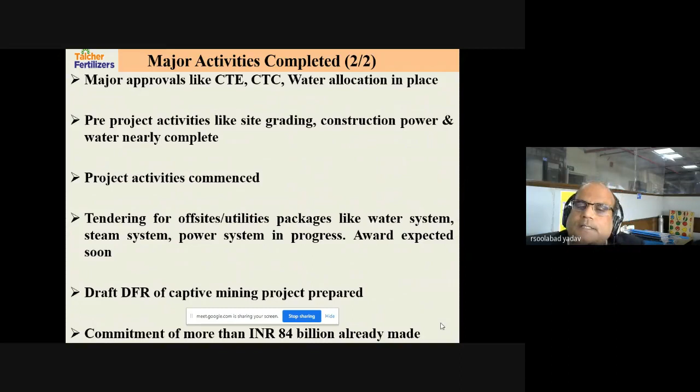Captive mine DFR is being prepared by CMPDI, and we have already committed and awarded contracts worth around rupees 8400 crore, that is 84 billion, already made. Next, please.

So, already in India, a few activities are underway for coal to chemicals. Coal gasification has been identified as one of the key sectors for ensuring self-reliance in energy.

Honorable Prime Minister has already set the target to gasify 100 million ton of coal by 2030. Implementation of the Talcher project is a step in this direction. In my opinion, success of the Talcher project will attract private investment as well as FDI investment.

EOI has been called by NTPC for setting up CO2 capture, hydrogen generation, and conversion to methanol. Coal to methanol project is being attempted by Coal India. Government of India has given mandate to all five subsidiaries of Coal India Limited, and they are in the process of preparing the DFR for coal to methanol. At the Raniganj plant, this has already been prepared.

Coal gasification is being extensively used by Messrs. Jindal at its Angul facility for production of DRI. Their plant is sometimes on, sometimes off, due to economics and coal availability. Recently, Reliance Industries has successfully commissioned a pet coke gasification plant at Jamnagar, equivalent to 20 MMCMD of gas. Their technology licensor is ConocoPhillips, using a transport bed.

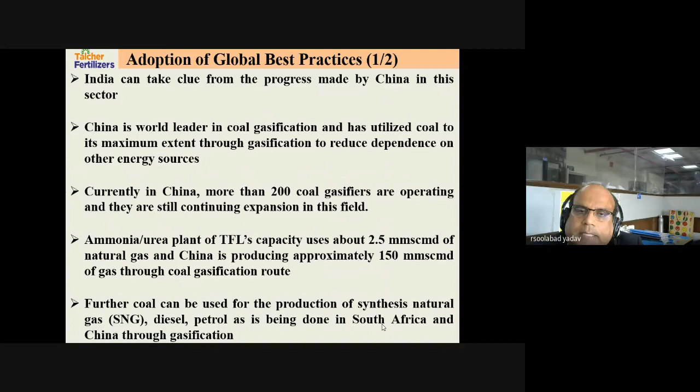India can take a cue from the progress made by China, which has more than 200 gasifiers in operation. Gas price keeps fluctuating, sometimes low, sometimes high, but coal price trends show China is the world leader in coal gasification with 200 gasifiers already. If we count one plant equal to a urea plant, it's around 2.5 MMCMD of gas. We can produce SNG, diesel, and petrol through gasification, as is being done in South Africa and China.

India should aim to follow the model adopted by China and South Africa for coal gasification. Success of the TFL project shall create competency and confidence in the country for coal gasification.

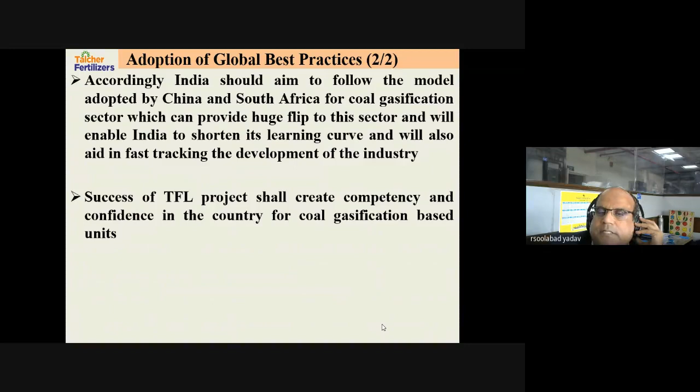Coal gasification needs support from Government of India so the sector finds its footing in the country. Gasification is at an early stage, so it needs enablers to create a conducive environment, which shows the concern of investors and the commitment of government towards the coal gasification sector.

Some of the enablers include implementation of the cluster model, which Government of India has already created, ease in land acquisition, suitable relaxation in captive mining modalities, expeditious single window clearance, policy support for proliferation of the coal gasification sector, and various tax breaks and waivers of duties and levies, especially in the initial stages. I think that's all on my side. Thank you.